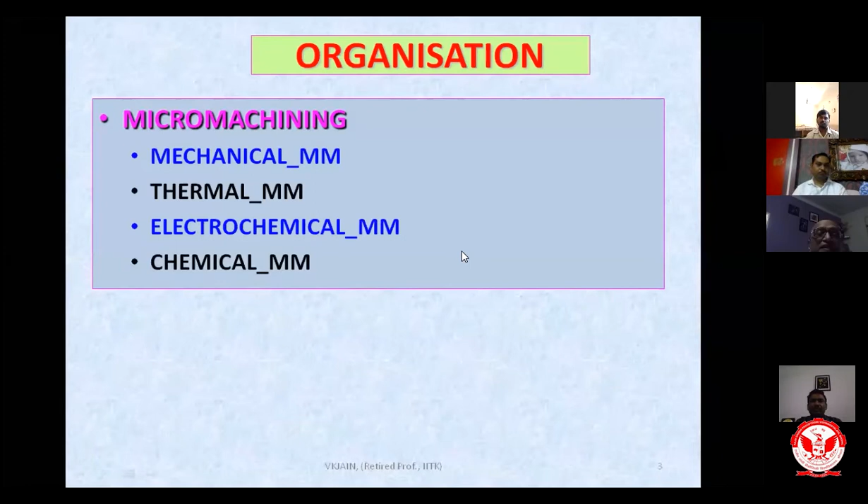Now, organization of the talk is as follows: micromachining, mechanical type of micromachining, thermal type of micromachining, electrochemical type of micromachining, and chemical type of micromachining. Since the time is limited, I will try to cover most of it. If something is left, then you can see in the books available on this particular subject.

Now first let me start with what is micro manufacturing. A set of processes used to fabricate features, components, or systems with dimensions most conveniently described in micrometers. When we talk of micro manufacturing or micromachining, the dimensions which we are making or fabricating should be less than 1 millimeter and definitely greater than or equal to 1 micrometer.

Now the question arises, what are the various methods of micro manufacturing? So there are these: material deposition can be used for micro manufacturing, material removal can be used, forming and shaping processes can be used for this purpose, joining can be used, and then casting can be used.

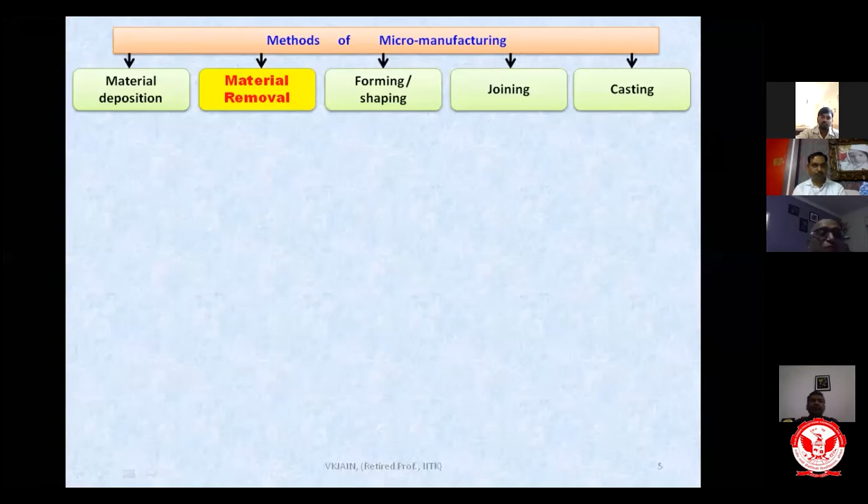You can see in material deposition, electrochemical spark deposition - lot of work has gone in this direction at IIT Kanpur. Electro discharge deposition, chemical vapor deposition also known as CVD, physical vapor deposition PVD, rapid prototyping, rapid tooling, additive manufacturing, or layer manufacturing - there are various names for this particular technique.

And then finally, LIGA. Then there are material removal or attritious processes, they are basically of two types: traditional material removal processes and advanced material removal processes. This talk will be concentrated on advanced material removal processes. Then you have forming or shaping, like rolling, forging, extrusion and drawing sheet metal. Then you have the joining processes like welding, brazing, soldering, and then you have the casting process.

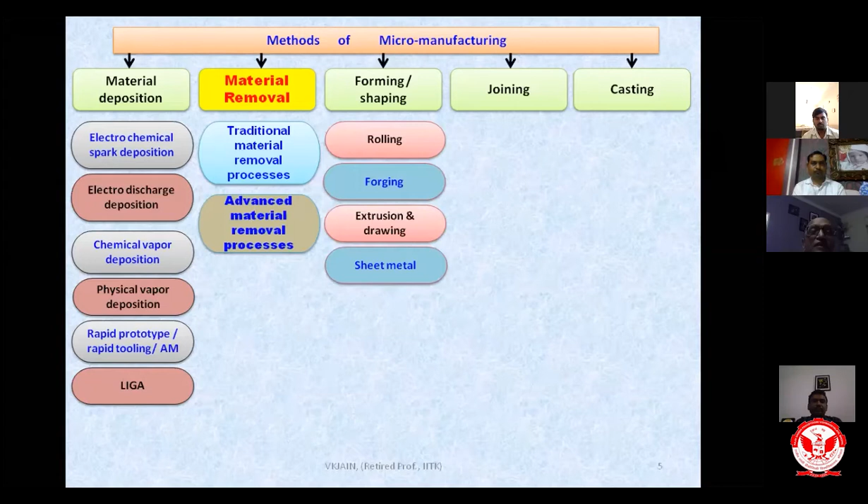Now, microfabrication has witnessed an excellence in R&D at a remarkable rate. If you see the last 3 decades or so, a lot of work has gone into micro manufacturing and microfabrication.

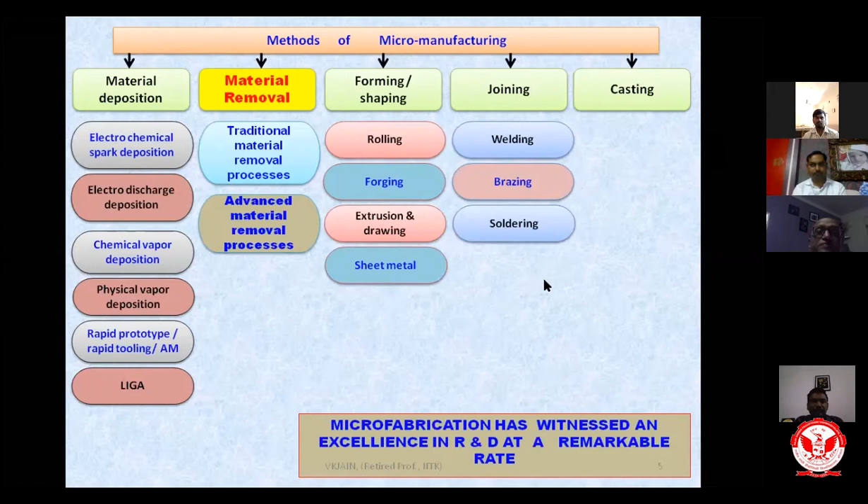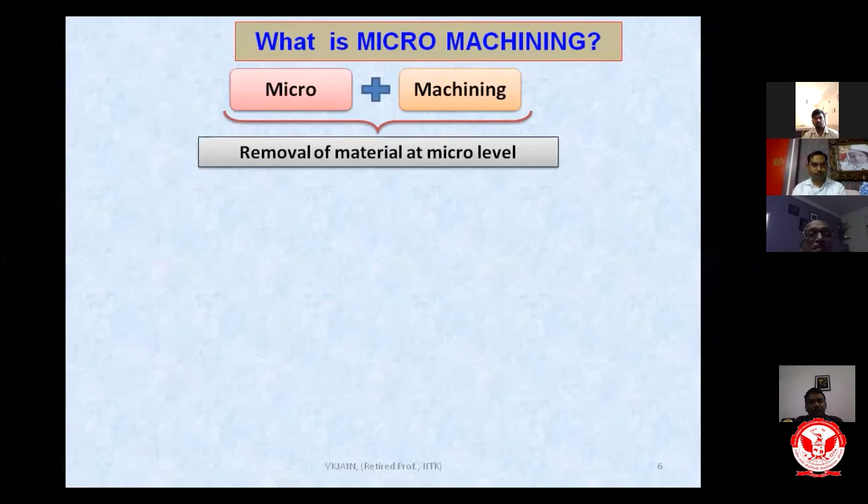What is micromachining? This is very important. So it is made up of 2 words: micro plus machining, that's the removal of material at micro level. Now the important thing is: macro components, but material removal is at micro nano level - then also you call it micromachining. Micro nano components and material removal is at micro nano level.

Examples: MEMS and NEMS. Now you can see here a picture - its size is 2 millimeter by 2 millimeter, and this is the leg of the house fly. You can see in this 2 millimeter by 2 millimeter sheet or screen, how many components are there. So each component is having the size smaller than 1 millimeter or so, and all features of that component are there.

Unfortunately, the present day notion related to micro manufacturing is that it means machining of highly miniature components with miniature features. Literally, it should not be so. It is not correct, because micro machining is made up of two words: micro plus machining.

That simply means machining at micro scale or micro level. So the correct definition is material removal at micro nano level, with no constraint on the size of the component. This is very important, you cannot put a constraint on the size of the component. The size of the component may be macro or meso, but still machining is at micro or nano level, so you call it micro machining or nano machining.

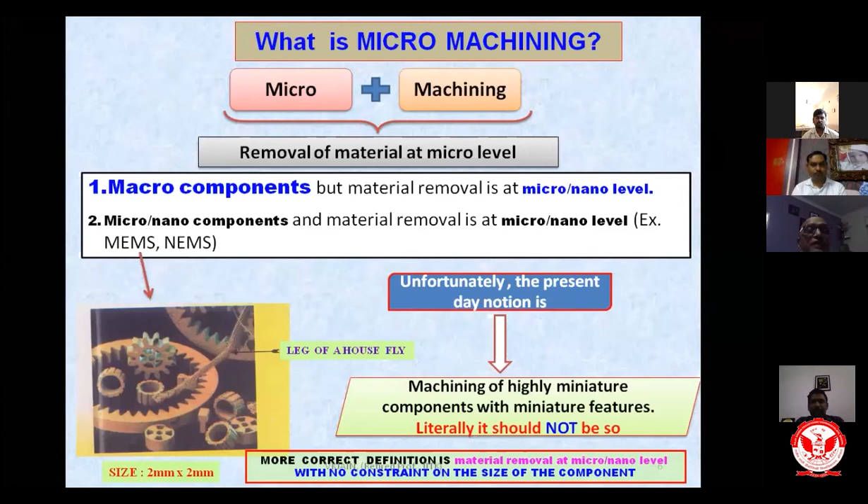Now, material removal processes can be classified into micro nano machining and micro nano finishing. In micro nano finishing, you are removing material at the micro or nano level, but the difference is that in micro machining you are creating a feature, while in micro nano finishing you are changing the characteristics of the surface produced by other methods, improving or deteriorating the surface finish according to the requirement. In certain cases, you may need a higher surface roughness value, and in some cases a lower one.

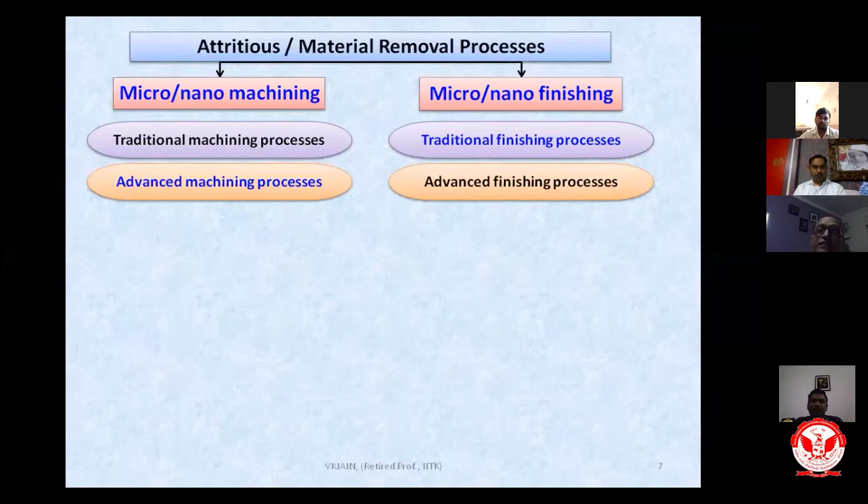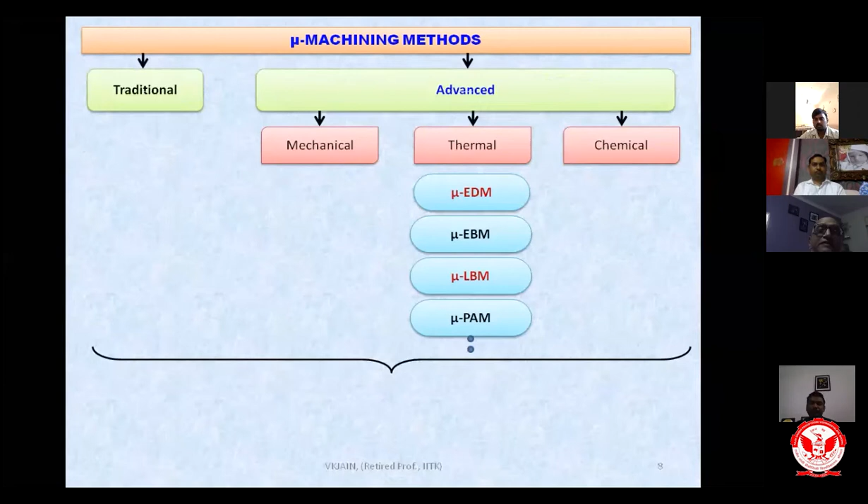Let us see what are the various micro machining methods. We have two types of micro machining methods. One is the traditional micro machining method, and you are familiar with these, like micro turning, micro milling, micro drilling, micro grinding, etc. Although grinding is a finishing process, it's still considered a machining process.

Then you have advanced micro machining methods. They can be classified into three categories: mechanical, thermal, and chemical and electrochemical. In case of mechanical, you have micro AJM abrasive jet machining, ultrasonic micro machining, and abrasive water jet micro machining.

In the mechanical type, you also have finishing processes like abrasive flow machining, magnetic abrasive finishing, magneto-rheological abrasive flow finishing, and magnetic float polishing. A lot of work has gone into these finishing processes at IIT Kanpur, but in this talk I am not going to talk about nano finishing processes. It is concentrated mainly on the micro nano machining processes.

Then you have the thermal processes: electric discharge micro machining, electron beam micro machining, laser beam micro machining, plasma arc micro machining, and so on. Then you have chemical or electrochemical type: electrochemical micro machining, photochemical micro machining, and so on. I have not listed another category, biological machining, where enzymes are used for machining or removing material.

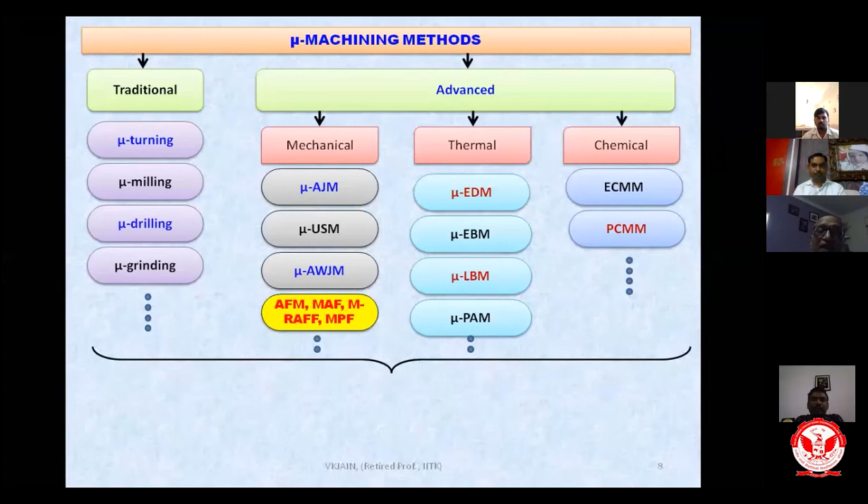Then you have these individual processes, and all of them have certain weaknesses and certain strengths. If one particular process cannot perform your work, what will you do? You can combine two or more processes to achieve your goal, and when you combine two or more processes, you call it a hybrid process.

Now, the beauty of the electrochemical spark micro machining process is this: ECM, electrochemical machining, is used for electrically conducting material, and EDM, electric discharge machining, is also used for electrically conducting material. But what about electrically non-conducting material? So researchers combined EDM plus ECM and developed a process called electrochemical spark machining. This process is based on both ECM and EDM, but it can be used for both electrically conducting and electrically non-conducting material.

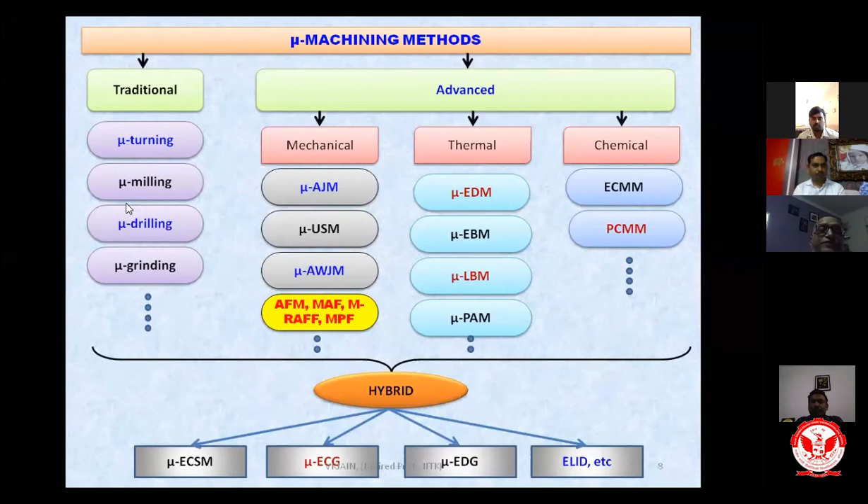Now I will quickly, in brief, tell you about the working principle of the mechanical type of micro machining process. It includes abrasive water jet machining, abrasive jet machining, and ultrasonic machining. Here you can see the inlet of water, the inlet of abrasive particles, here is a nozzle, and here is the guard, etc. And this is the mixing tube, where you have both water and abrasive particles.

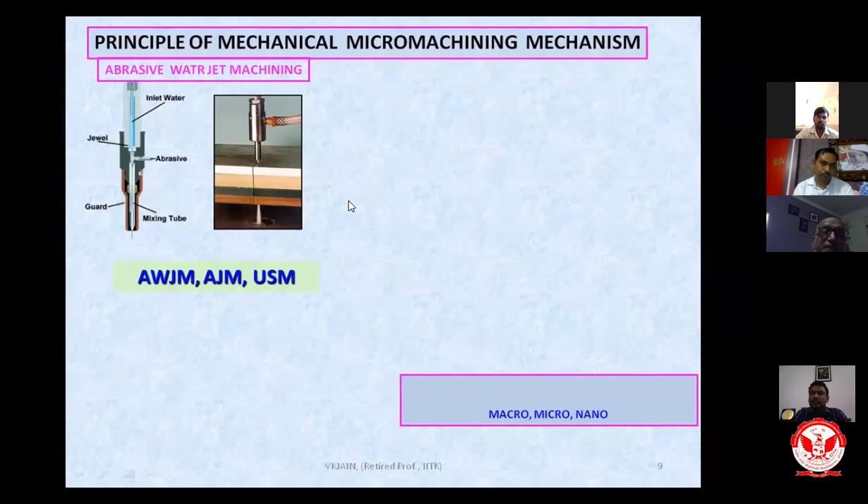When this abrasive water jet is coming, as you can see here, it is able to cut very thick metal and non-metal or composite material sheets. This is the abrasive water jet, this is the head, and this is the workpiece being machined. This process is very common for cutting and even dismantling nuclear power plants. There you don't want to send a human being, rather you send a robot to dismantle the nuclear power plant. Then you have the ultrasonic machining process.

One thing I would like to mention here: in case of abrasive water jet machining, the velocity with which this jet is moving is very, very high. It can be as high as 900 meters per second. So you can calculate the kinetic energy of the abrasive particle with which it is hitting the workpiece surface, and that kinetic energy is responsible for removing the material in this particular case.

Same way, here is the ultrasonic machining or micromachining process principle. This is the tool, and this is the workpiece being machined, and you have the slurry. This slurry consists of liquid and abrasive particles mixed with some additives. When you are vibrating this tool, it vibrates at ultrasonic frequency, which simply means around 20,000 hertz, 20,000 times per second. There are hundreds of abrasive particles hitting the workpiece surface, and this is quite heavy.

So with high kinetic energy, when these abrasive particles are hitting the workpiece surface, the workpiece material is removed either by fracturing or by deformation, depending upon the type of workpiece material. And you are able to create a feature which is close to the replica, the inverse replica of the tool.

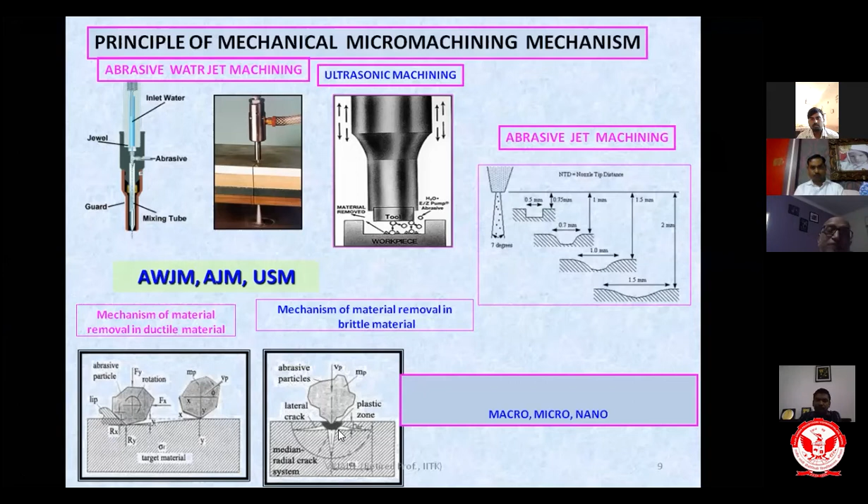Once it becomes a brittle material, the mechanism of material removal is the same as I showed earlier. Here you can see forces acting: one is the normal force, and this is the cutting force. This is removing the material in the form of microchips, or here are the brittle fractures.

Abrasive jet micromachining, or abrasive jet machining. I am not going to discuss all these details, but various types of abrasives are used. The gases, other than air, you can use carbon dioxide gas, nitrogen, or air as the gas. The nozzle is made up of tungsten carbide or sapphire.

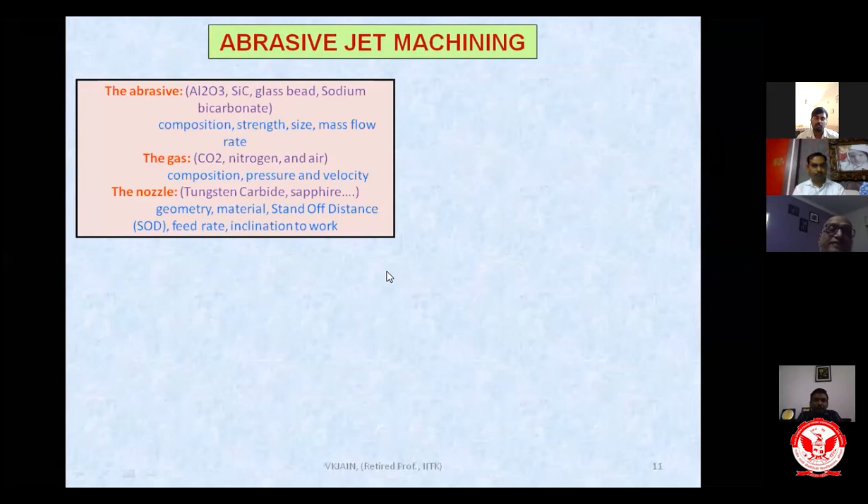It is quite commonly used for cleaning purposes also, and finishing purposes also. You can see the hood is here, so that whatever abrasive particles are spreading in the atmosphere, they don't go out and hurt or harm the operator. Rather, it is taken out from the hood.

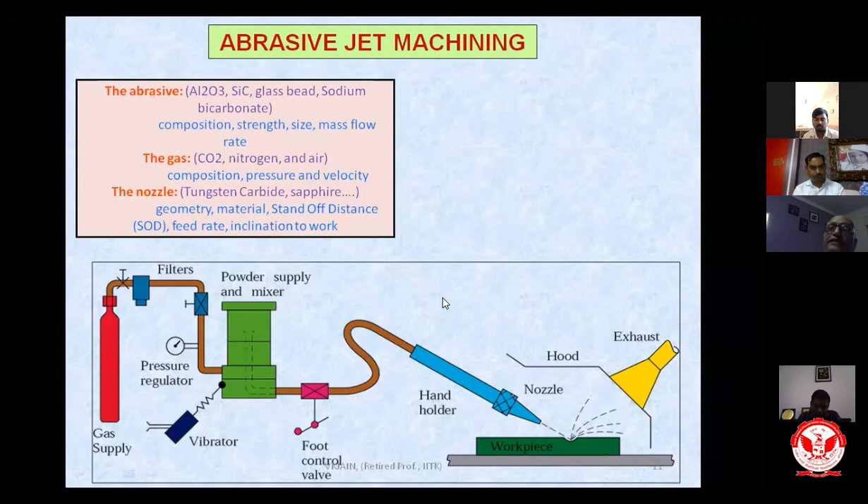You can see here some of the applications of this abrasive particle jet cutting. This cavity has been formed, and they are going to cut it. This cavity has been formed, and these cavities can be of more than 1 millimeter, or they can be of less than 1 millimeter, depending upon the size of the nozzle and the machining parameters that you are using.

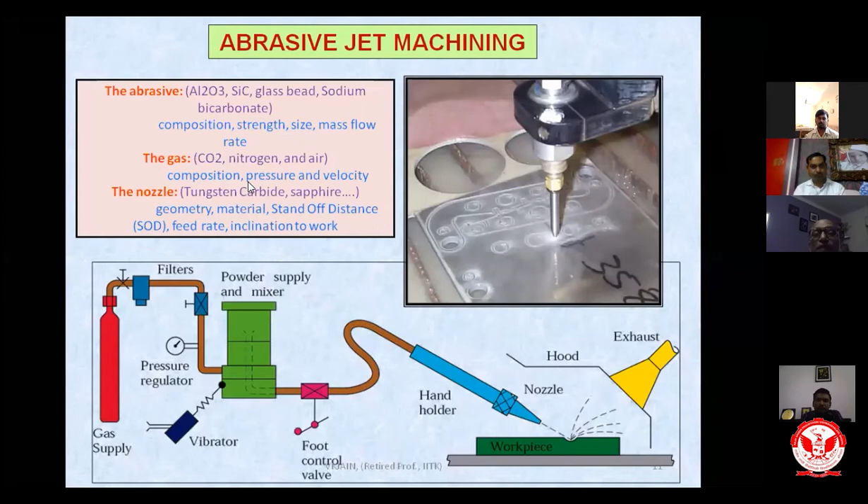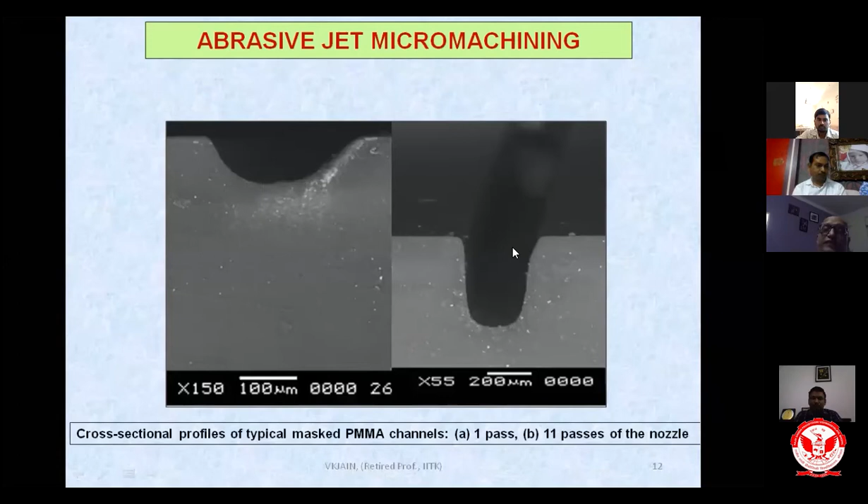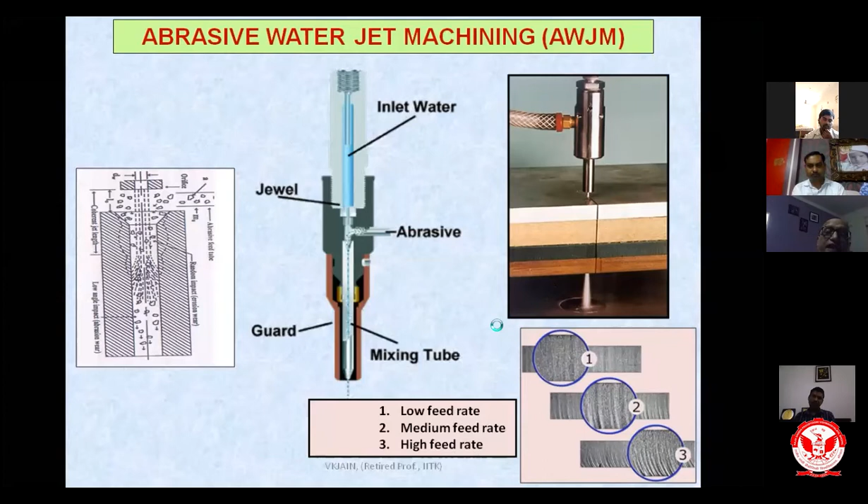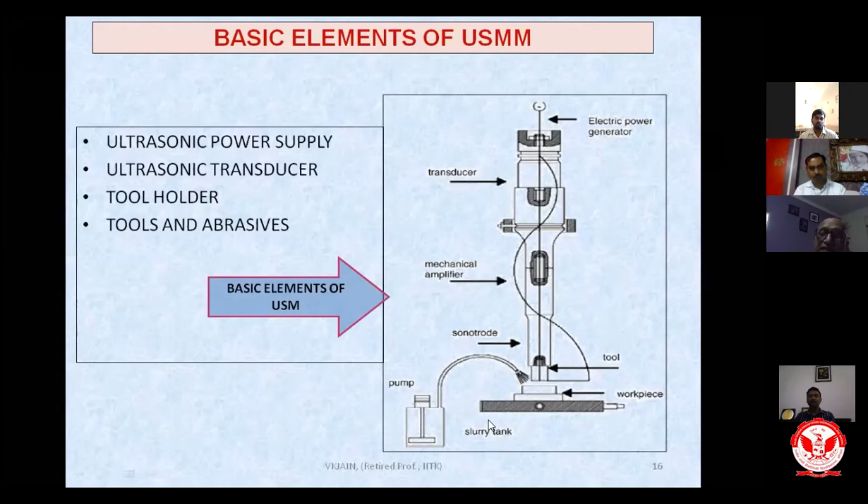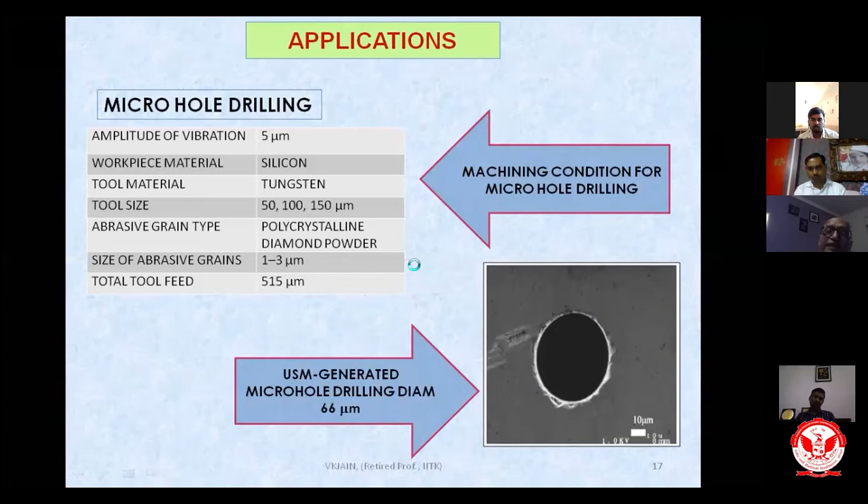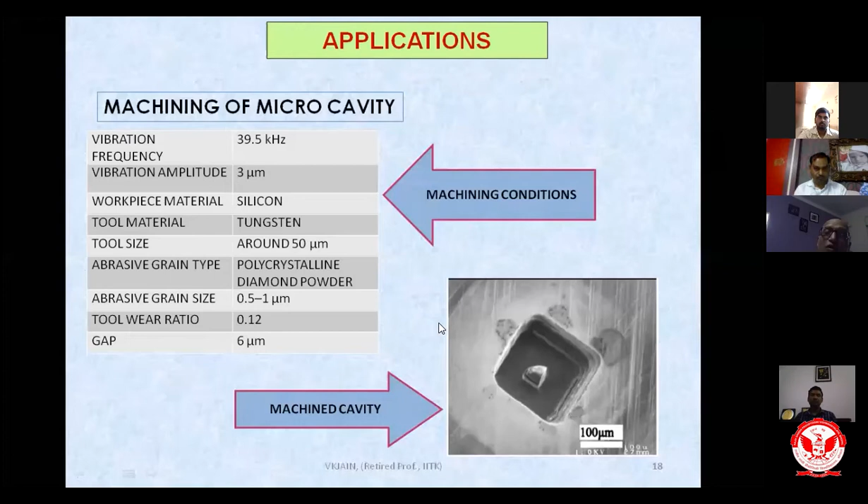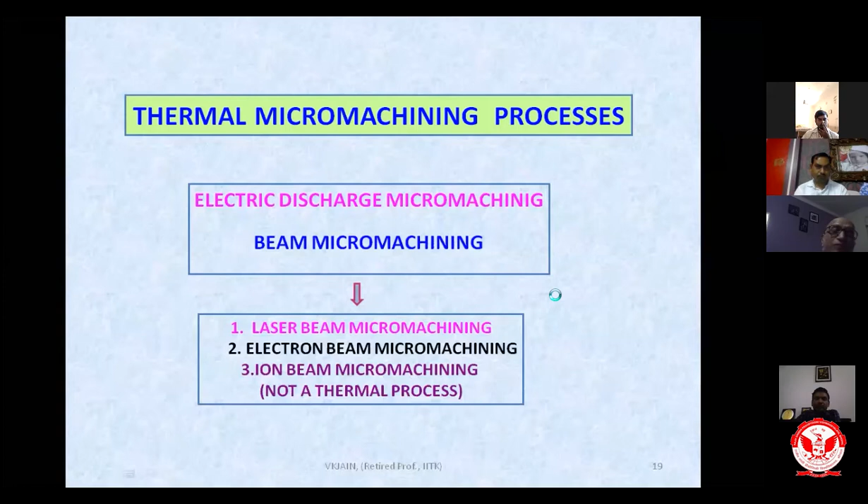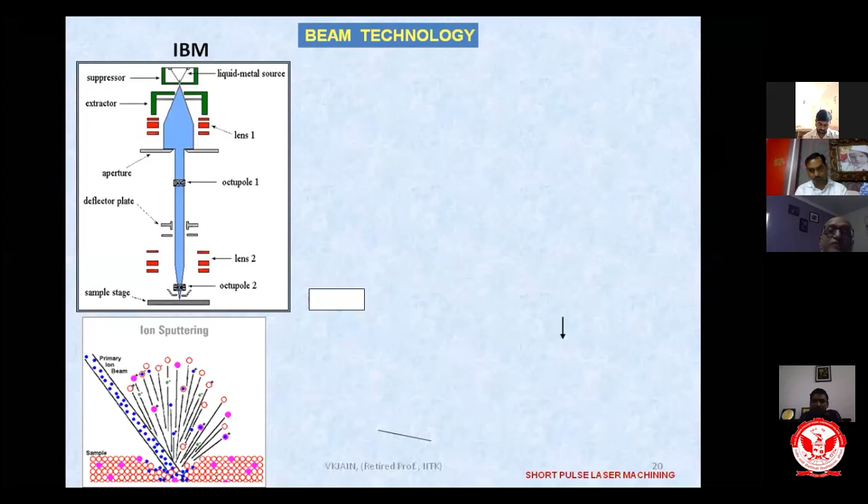But really, the energy of the ion is much more than the bonding energy of the atoms. So what happens is that one particular ion removes more than one atom - a cascading effect, as it is known. And once it removes more than one atom, if it still has larger energy, it will go and get implanted at the bottom, as you can see over here. Really, we don't want implantation of the ions at the bottom, because that is known as a defect. So this is how it works.

Now let us see the electron beam machine. Here we are using electrons instead of ions. You know, you can have electrons and ions in any atom. These electrons are considered to be massless, meaning they hardly have any mass compared to ions or atoms, but we are able to utilize the electrons for removal of material.

How? The electrons are extracted from the cathode and move from there towards the anode. Here is the anode, and these are the focusing coil and deflecting coil. With the help of the focusing coil, you can focus this beam at a particular point on the workpiece surface, and you can move this beam in this direction or that direction with the help of the deflection coil.

Now, atoms or electrons are considered to be massless, but we know the kinetic energy of a particle is half mv squared, where v is the velocity and m is the mass of the particle, here the electron. The mass is negligible, but the velocity with which these electrons move from cathode towards the anode, or towards the workpiece, is very close to the velocity of light. And the kinetic energy becomes half mv squared. So if you calculate, you will find it has enough energy, and when it hits the workpiece surface, it is able to raise the temperature of the surface enough to melt and vaporize it.

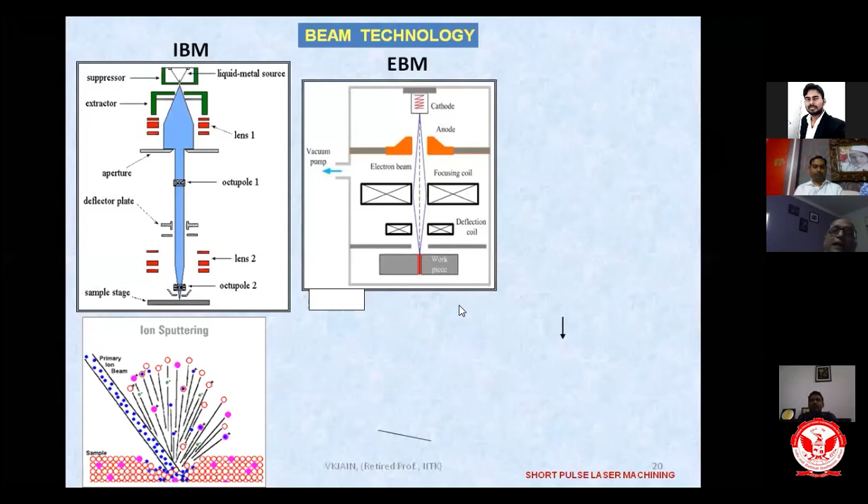Any material, including diamond, you can melt or vaporize, or melt and vaporize the workpiece material, depending upon the workpiece material type. And if you have relative motion between the beam and the workpiece, you can create different kinds of features on the workpiece surface. This is how ion beam machining and electron beam machining work very efficiently.

One thing I'd like to mention: ion beam machining is not used even for micromachining, it is used for nano machining. Micromachining by ion beam machining takes a lot of time, so normally it is used for nano machining. But electron beam micromachining is used for micromachining, and laser beam machining is also used for micromachining.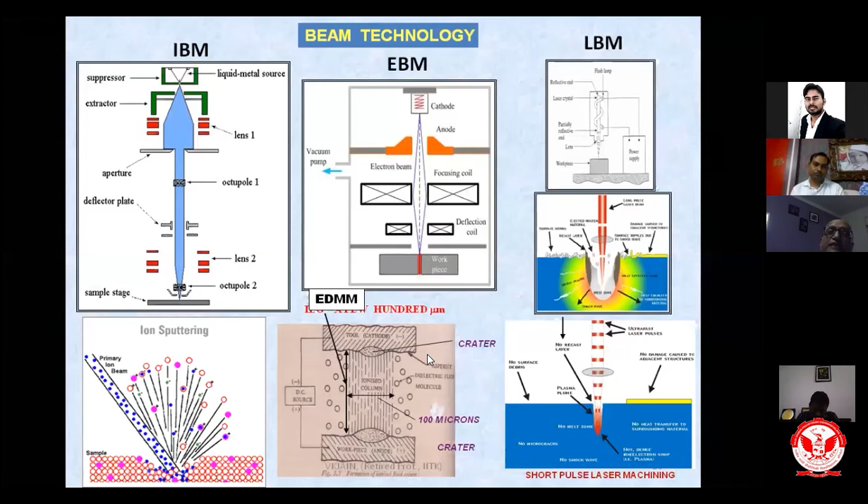Now, some features of electric discharge micromachining: ability to machine any electrically conducting material irrespective of its hardness. If you recollect, traditional micromachining processes like micro turning, micro milling, micro drilling, etc., require the tool to be much harder than the workpiece material, so there are a lot of constraints in micromachining. In electric discharge micromachining, there is no constraint of hardness of the workpiece material, and machining can be done without applying pressure.

Also, in case of EDMM and EDM, you are not applying any mechanical force. You can easily machine curved surfaces, inclined surfaces, and very thin sheets. Micro features can be created, including high aspect ratio features, with the help of electric discharge micromachining. High aspect ratio means depth divided by the diameter of the feature being created, right? That is known as aspect ratio.

Now, examples of the EDMM process. You can clearly see here these are the micro holes that have been drilled: 12.5 micrometer, 10.5 micrometer, 8.5 micrometer, 6.5 micrometer. These are the kind of holes which have been drilled using the electric discharge micromachining process.

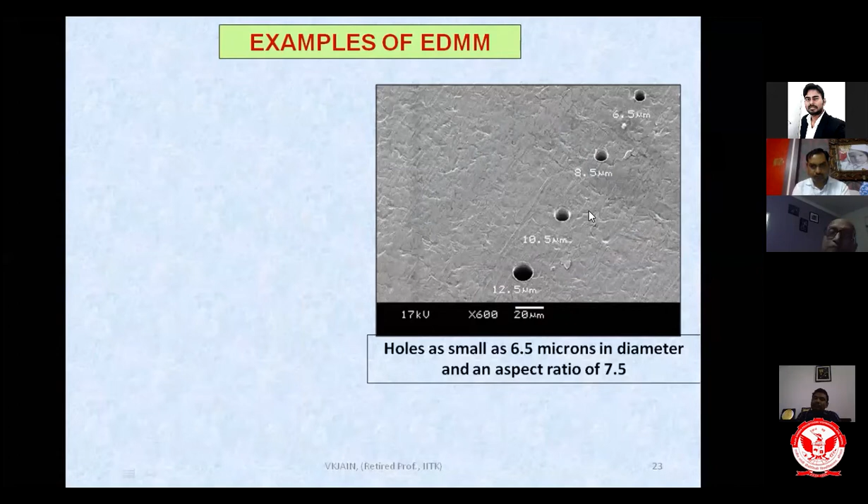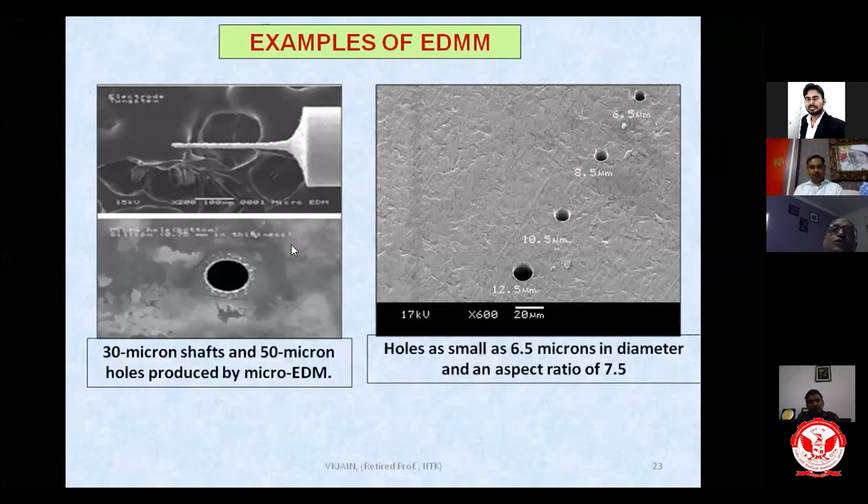Now you can see this is the rod or small pillar, or the tool, that has been created with the help of electric discharge micromachining. And the same tool has been used for drilling a hole. That's known as in-situ utilization of the tool. This is very important because if you shift this tool to some other machine, there will be an axis difference and you will not get the accurate size of the hole. So it is always desirable that wherever you create the tool for micromachining, especially electric discharge micromachining and electrochemical micromachining, you should perform the micromachining operation on that same machine.

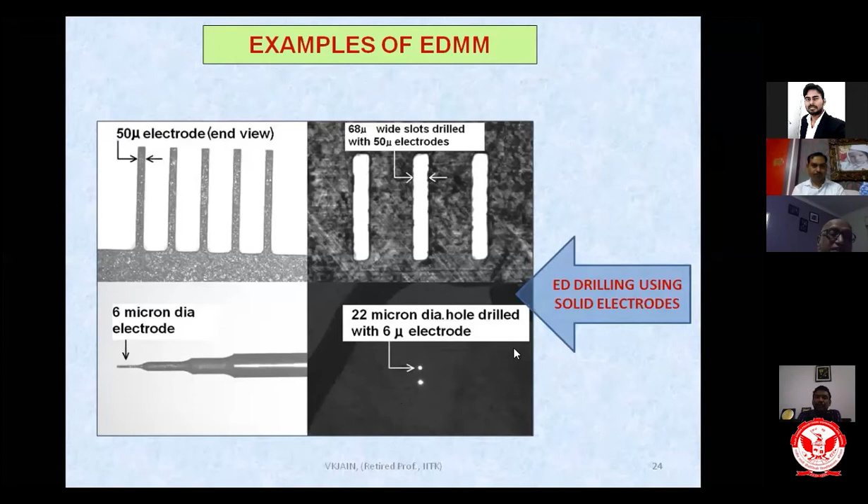So you can appreciate from these examples the kind of different components created. Now please note carefully, I am calling all of them micromachining, but the size of the component is in macro or meso size, meaning much larger than 1 millimeter.

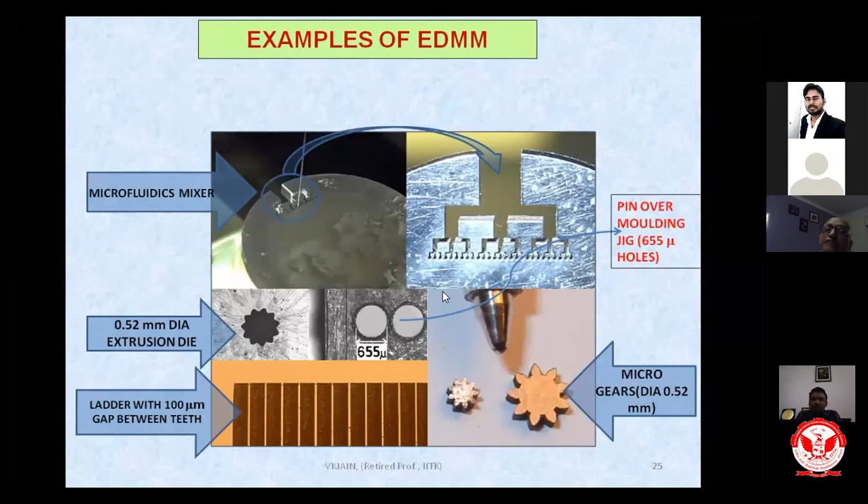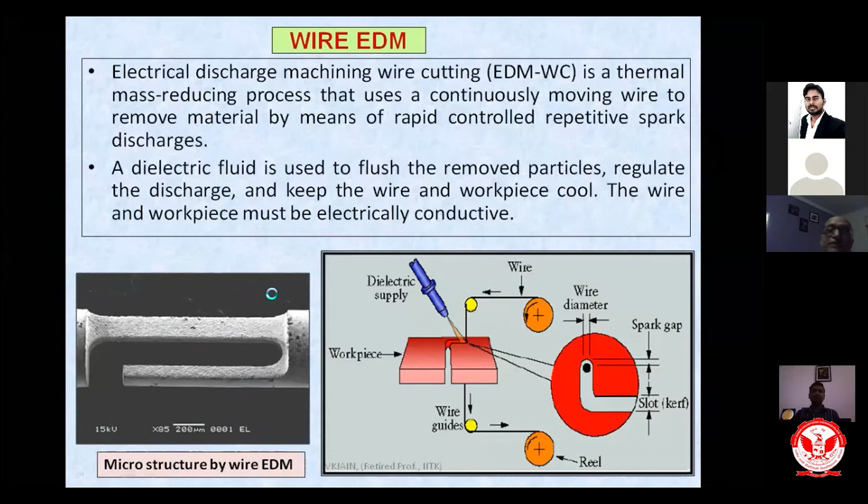Then a very famous, very useful process is known as laser beam micromachining. I think all of you may recollect your childhood days, where you might have taken a lens and concentrated the sun rays, burning a piece of paper and telling your friend, see, here is the magic, I am able to burn a piece of paper with the help of this device, that is the lens. What you are really doing is concentrating the sun rays, and the temperature or energy becomes so high that the paper burns.

A similar kind of concept has been used in developing the laser beam machining and laser beam micromachining process. Here you have the laser gun. The laser beam is created with the help of a lens, it is concentrated, and at a particular point it is focused. The temperature is so high in this process that any material known to us can be melted or evaporated at that particular point.

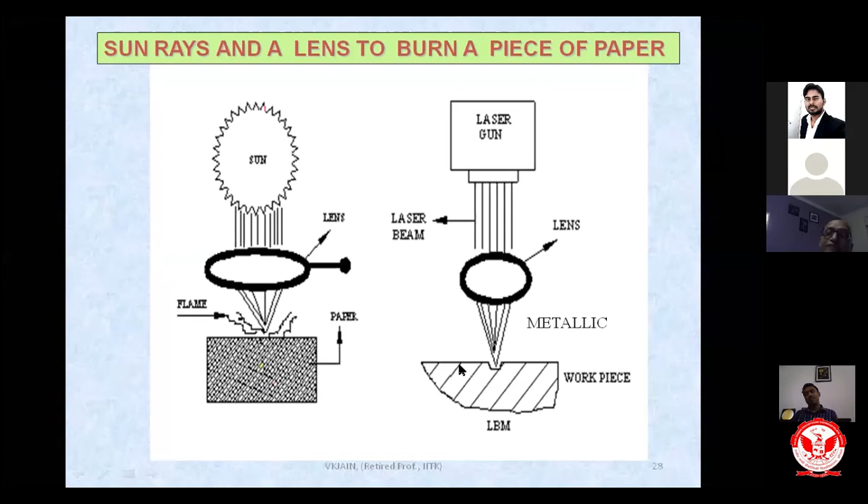Now, if you have relative motion between the workpiece and the laser beam, you can create different kinds of features. The workpiece material can be metal, non-metal, or a composite material. It need not be electrically conducting or non-conductive, but two constraints are there: the material should not have very high thermal conductivity and should not be highly reflective. Otherwise, you cannot machine it efficiently. That is the main constraint with this process.

Now, there are basically two types of laser: gas laser and solid state laser. Here the lasing medium is say CO2 or Nd:YAG laser, and you can see the wavelengths. Excimer laser is 193 to 351 nanometer. In case of CO2, it is 10 micron, and in case of Nd:YAG laser, 1.064 micron. These are the wavelengths.

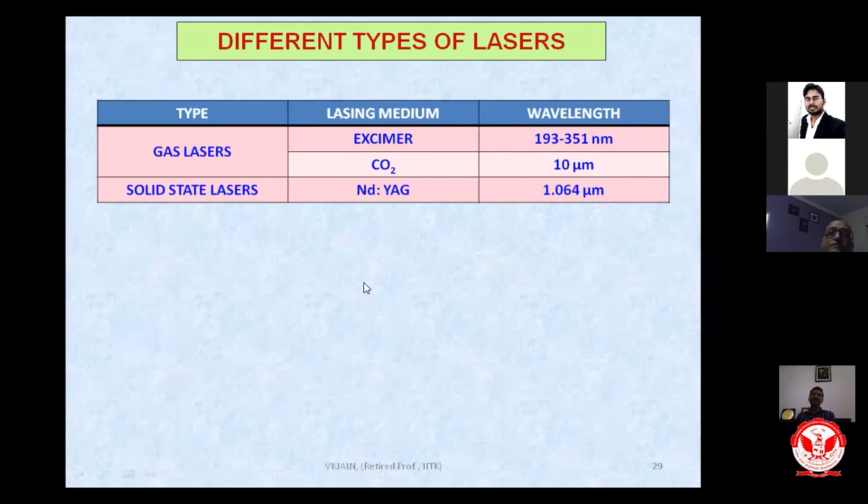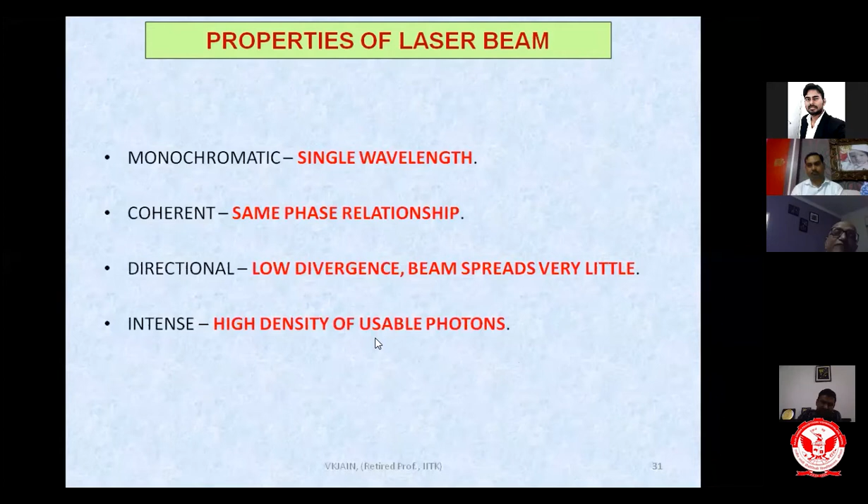Now, there are certain properties why laser is so commonly used in industry and day-to-day life. It is monochromatic, single wavelength; coherent, same phase relationship; and directional with low divergence. This is very important, it has very low divergence and the beam spreads very little. Finally, you have very high intensity of usable photons. That's why any material known to us can be melted, vaporized, or burned with this process.

Now you can see here, this is an enlarged view of the same picture I explained earlier. You can see the defects clearly: surface debris are there, this is damage caused to the adjacent structure, and this is the cavity being created. This is the melt zone, shock wave is moving over there, these are micro nano cracks being formed, this is the recast layer, and this is the ejected molten material going out, which may get deposited here or elsewhere.

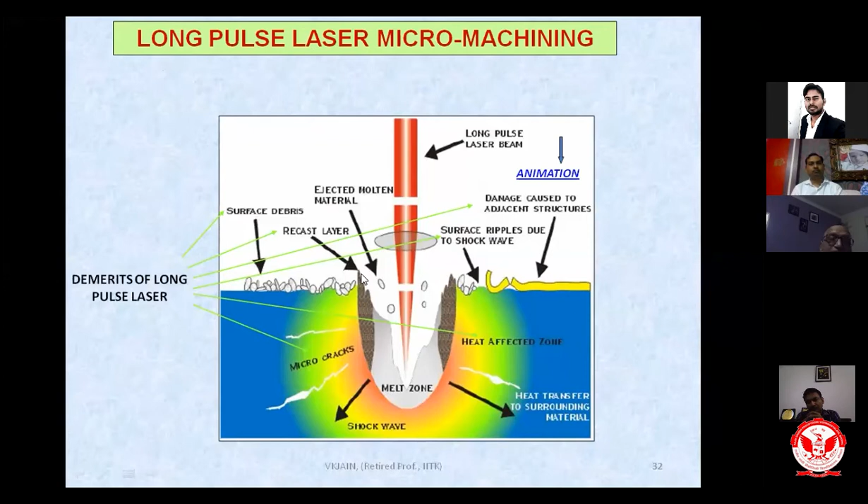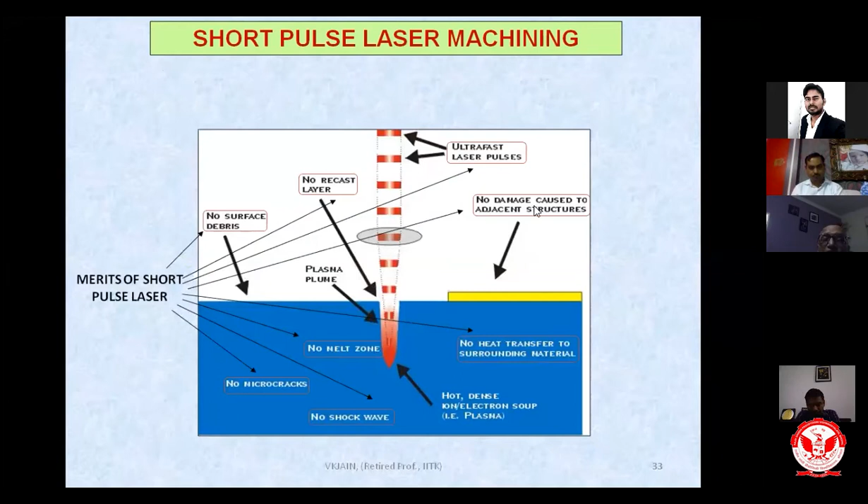So you can see clearly, when using the long pulse laser for micromachining, you get so many defects. Hence, it is recommended not to use the long pulse laser, rather use the short pulse laser. Now you can see here, there is hardly any surface damage, no damage caused to the adjacent structure, no recast layer, and so many other defects are not there.

Now another thing is it can be used for all materials. As I told you, there is very high power consumption, and it cannot cut material with high heat conductivity and high reflectivity. These are the two constraints with this particular process. Otherwise, it is very useful.

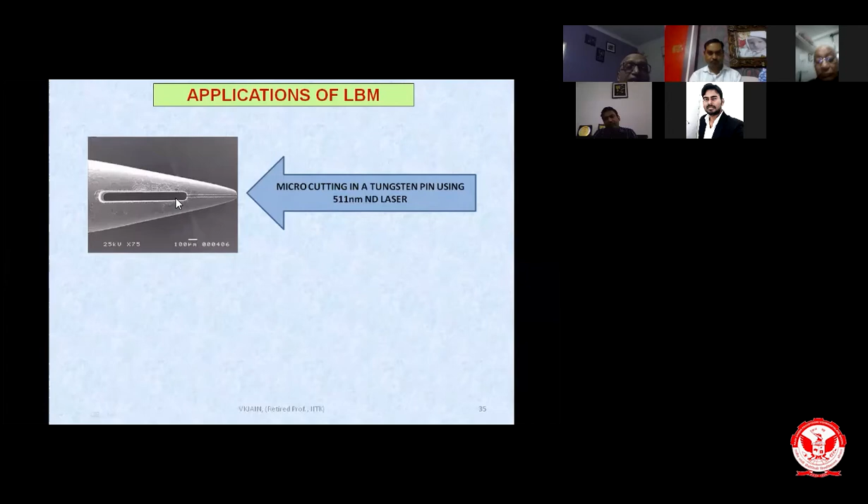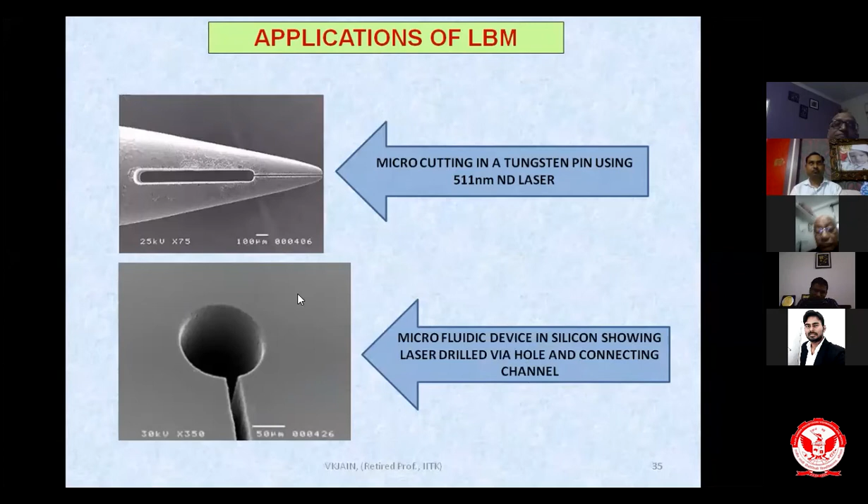Now this is very interesting. I don't know whether you can see me or not, but I don't have hair. But most of you may be having hair. Now if I ask you to write your own name on the hair, I don't think you can write your own name on the hair. But it has been done.

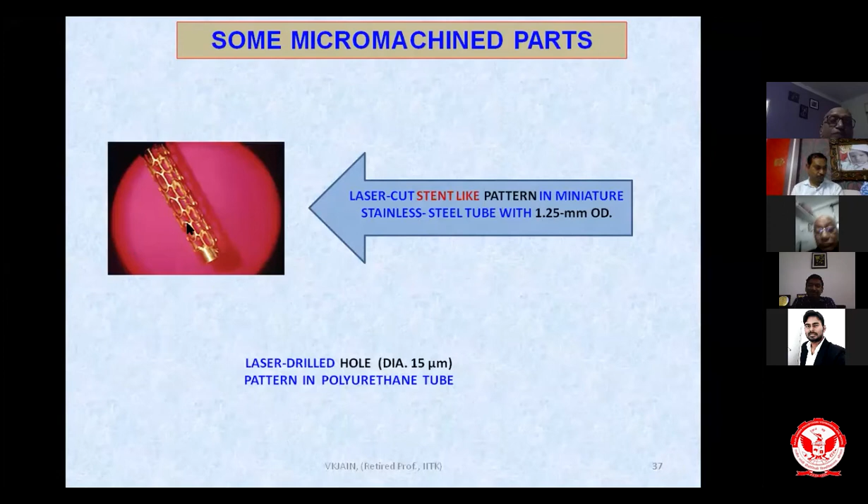Now you can see here a laser cut stent-like pattern on a stainless steel tube. The outer diameter of this tube is 1.25 millimeter, and you can see you are able to create micro features on this particular tube. This is a stent-like pattern over there.

And then there is another one. You can see the hole of 15 micrometer. Circular hole and square hole have been drilled on this particular tube with the help of laser beam micromachining, and such kind of features you can create easily with the help of laser beam micromachining.

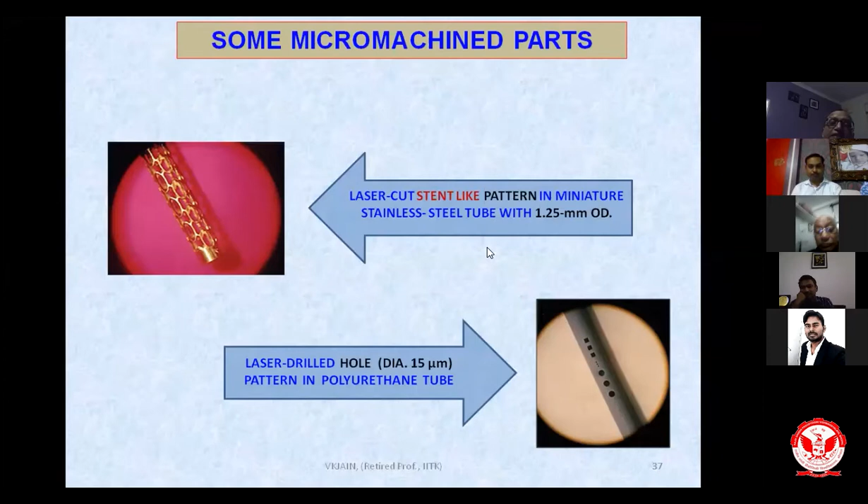Now the question here is whether in this particular chamber you should have air atmosphere or vacuum. Now let us see why vacuum is required. Now this is the electron beam which is coming over here and hitting the workpiece surface, and there is a vacuum, so there is no interaction between the air molecules and the electron beam.

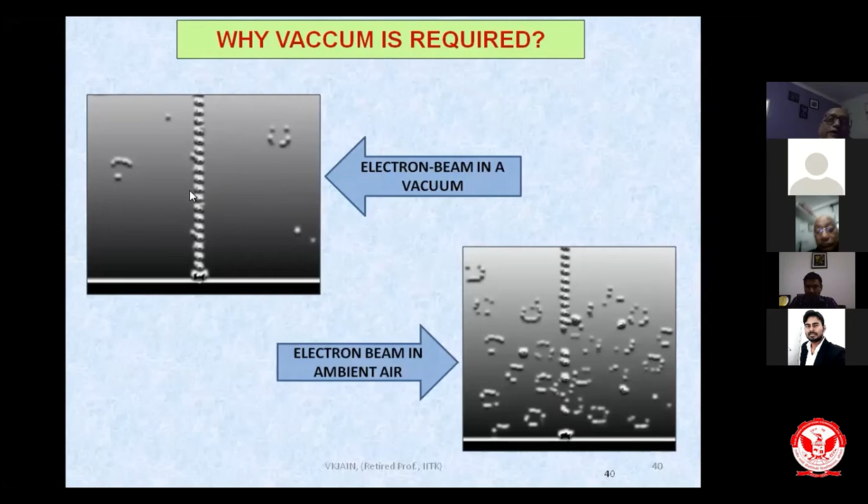But if you see this one, here air is present inside. We have not created the vacuum in the machining chamber, and you can see these electron beams are hitting, colliding with the air molecules, and they are dispersing, going away from their path. Whatever energy they have, the molecules are also quite strong, and you are not able to get a good cut over here. You need very high kinetic energy for getting a reasonably good cut over here. So it's always desirable to have vacuum in the machining chamber in case of electron beam micromachining.

Now, with the help of electron beam micromachining, industry people created 90 micrometer holes with a density of 4,000 holes per square centimeter on stainless steel, with a sheet thickness of 0.2 millimeter, and the time taken is just 10 microseconds per hole.

But industry people, especially textile and fruit juice industries, were not happy. They said it is too big, we don't want that. So they created holes of 6 micrometers, 0.006 millimeter. Hole density is 200,000 holes per centimeter square, thickness is 0.12 millimeter, and the time taken is just 2 microseconds per hole, compared to 10 microseconds earlier. So you can see the capabilities of electron beam micromachining, and you can make many required components with this process.

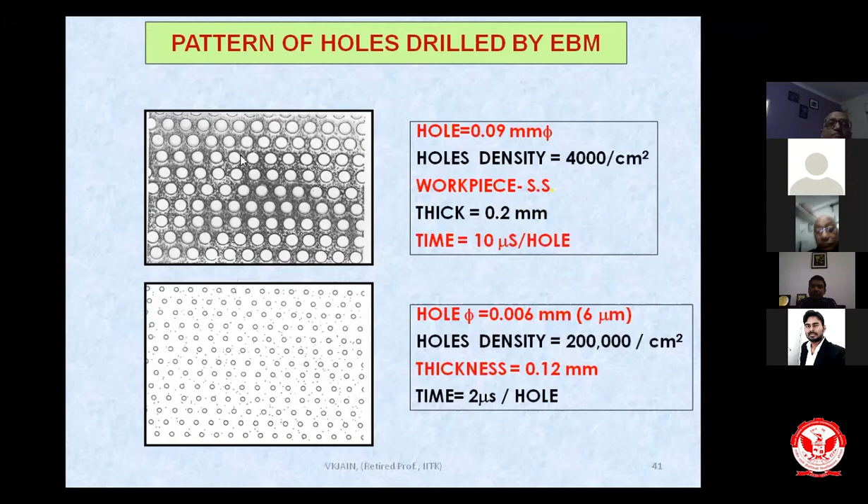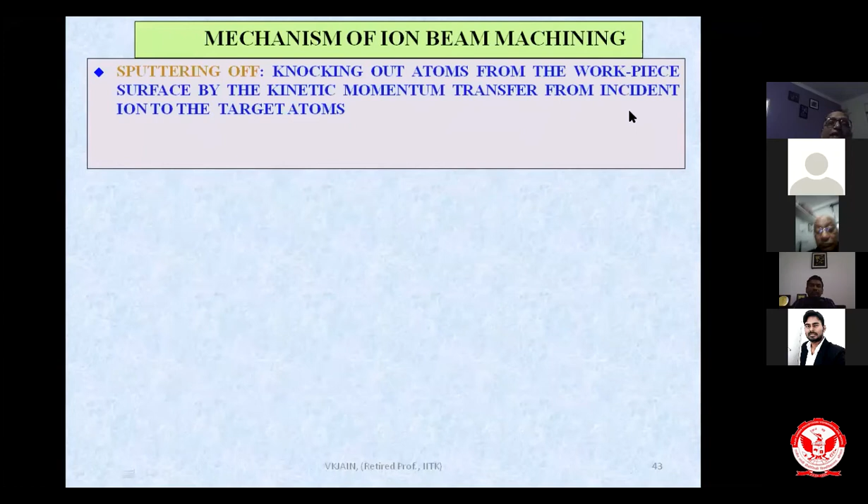Ion beam micromachining - I have explained the mechanism to you. It is known as sputtering, that is, knocking out atoms from the workpiece surface by kinetic momentum transfer from the incident ion to the target atoms. Removal of atoms occurs when the energy transfer exceeds the binding energy of the atoms.

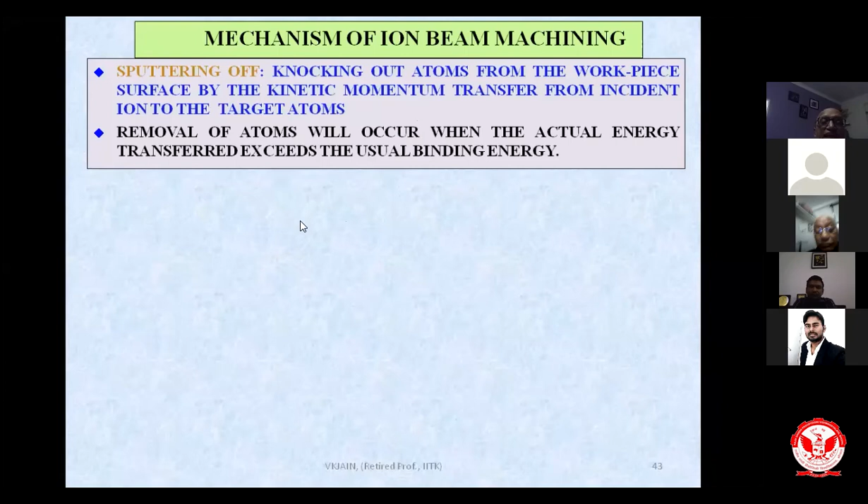So what it means is, at sufficiently high energy, a cascading event takes place. Ions penetrate more deeply into the solid, several atoms or molecules are ejected out, and the bombarding ion becomes implanted deep within the material. That is what I showed you - implantation by one ion, where more than one atom is displaced or removed.

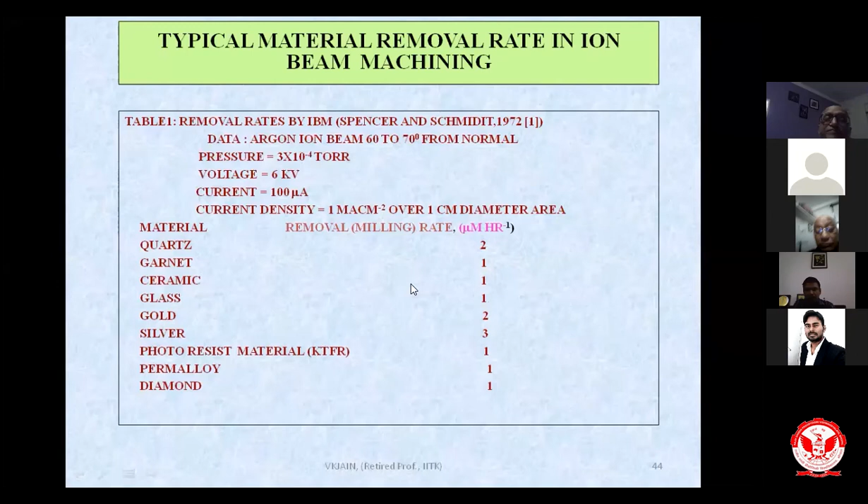As a result of electrolysis, the workpiece material is dissolved, and ferrous hydroxide or ferric hydroxide is formed if it's iron. This electrolyte moves out of the inter-electrode gap at a reasonably good velocity, 20 to 30 meters per second. So you are able to create an approximate inverse replica of the tool on the workpiece surface. This is the principle used for electrochemical micromachining.

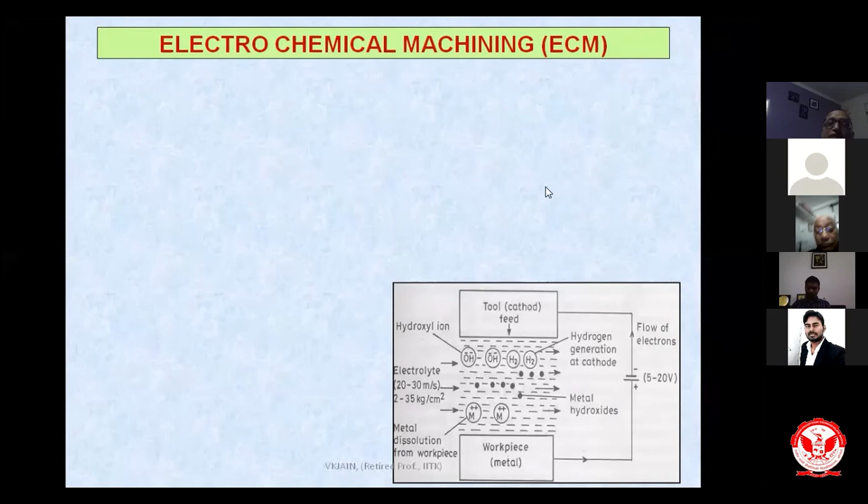These are various kinds of setups that have been developed. This setup was developed at Jadavpur University, and at IIT Kanpur many setups have been developed for electrochemical micromachining.

So the reactions, if it is iron, are: iron plus water gives ferrous hydroxide plus hydrogen gas. In some cases you get ferrous hydroxide, in some cases ferric hydroxide. So it is very important to know at what valency a particular workpiece material is dissolving, if you want to design the tool for electrochemical micromachining.

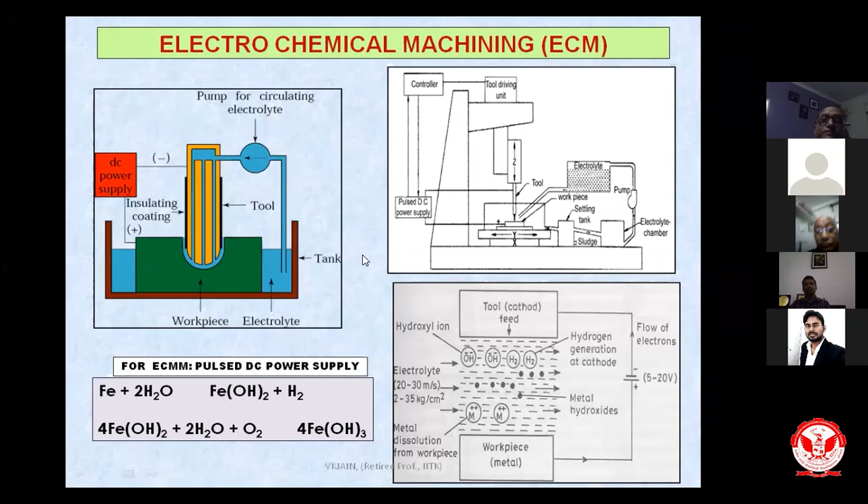Micropillars have nano hairs over them, and this surface becomes a hydrophobic surface. Now the question is how to create this hydrophobic surface artificially.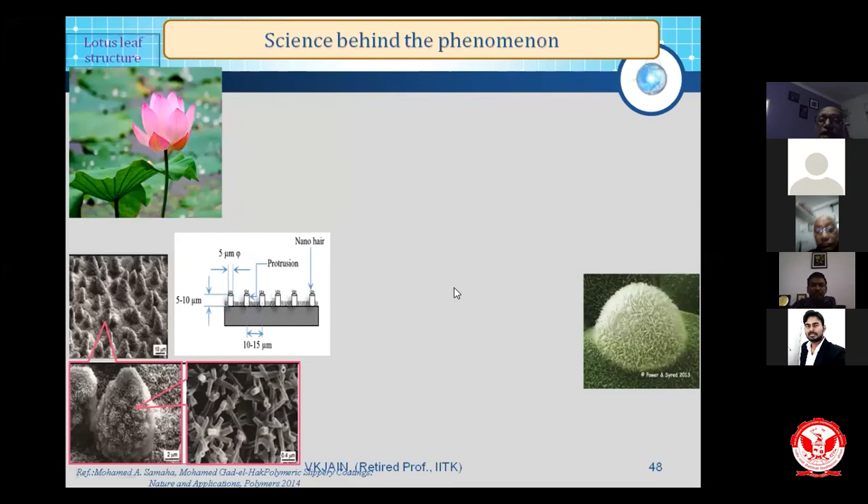And this is another example, esculenta. You can see here the micropillars and the nano hairs over here, and these are all hydrophobic surfaces. That means water does not stay there; the contact angle is more than a certain angle. Now you can see the hydrophobic surface shown here. This is the difference between this and this.

We wanted to create this kind of surface artificially on metals. Dr. Divyansh Patel did a lot of work in this particular area. You can see here this is the hydrophobic fabric. Nowadays people are making hydrophobic fabric.

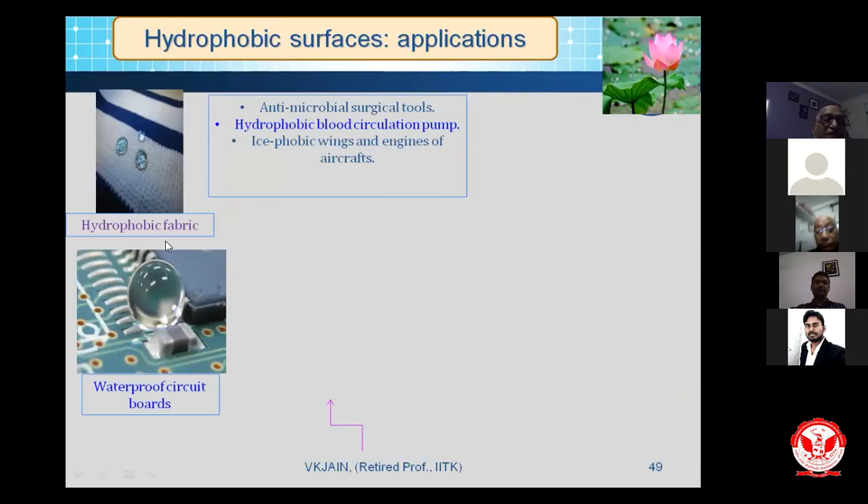So if you go during raining season, your clothes do not get wet. Or if you are going inside the sea or inside the river, your clothes will not get wet. So this kind of hydrophobic surfaces or hydrophobic fabrics are being produced.

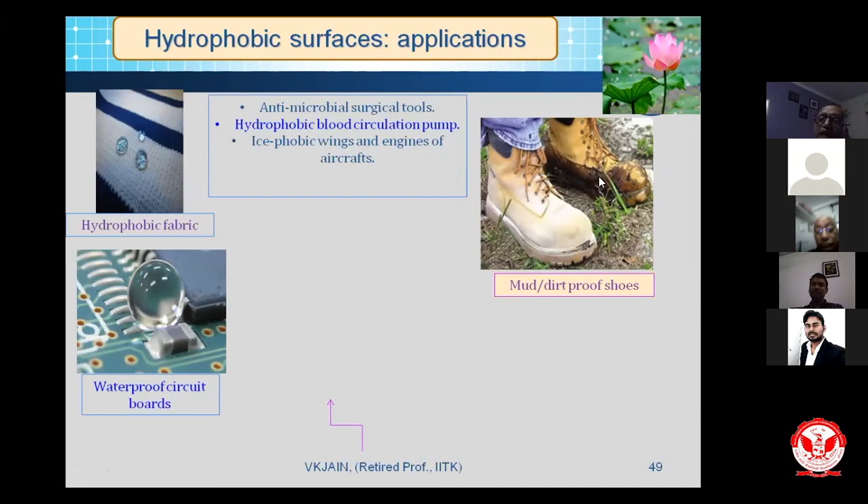Now see the shoes over here. This one is having the hydrophobic surface, this one is not. Then he went inside the mud. You can see the difference in the shoe. The one without the hydrophobic surface has a lot of mud on it. The one with hydrophobic surface has no mud remaining on it.

This is the sea, bottom of the ship. Now you can see here, this part is not having the hydrophobic surface, this part is having the hydrophobic surface. So bioorganisms are there on one, no bioorganisms on the other. It has a lot of applications, even in creating the wings of the aircraft so that no ice gets deposited or no water gets deposited there.

Now you can see a water/oil repelling application over here. It is just staying over there, not getting adhered to the surface.

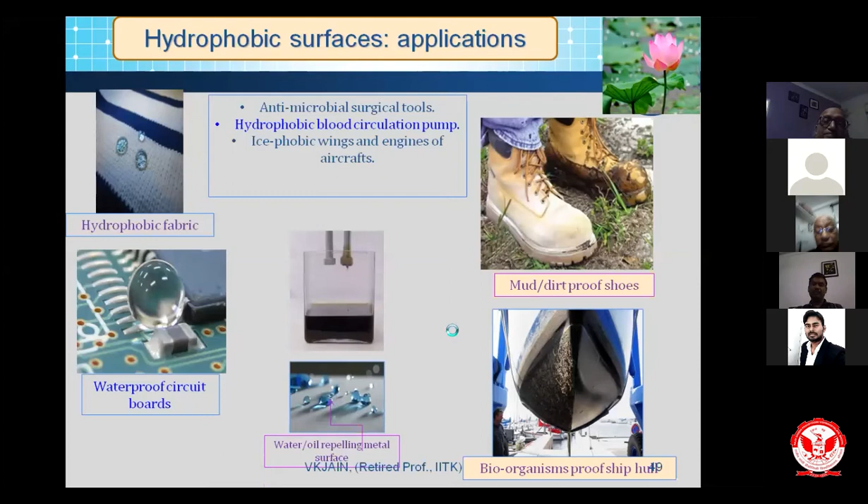This is the kind of feature that was created at IIT Kanpur using electrochemical surface texturing. Texturing was done, microchannels were created. Importantly, first they created the microchannel in this direction, then at 90 degrees they created the microchannel in the other direction. So they were able to create pillars of this kind.

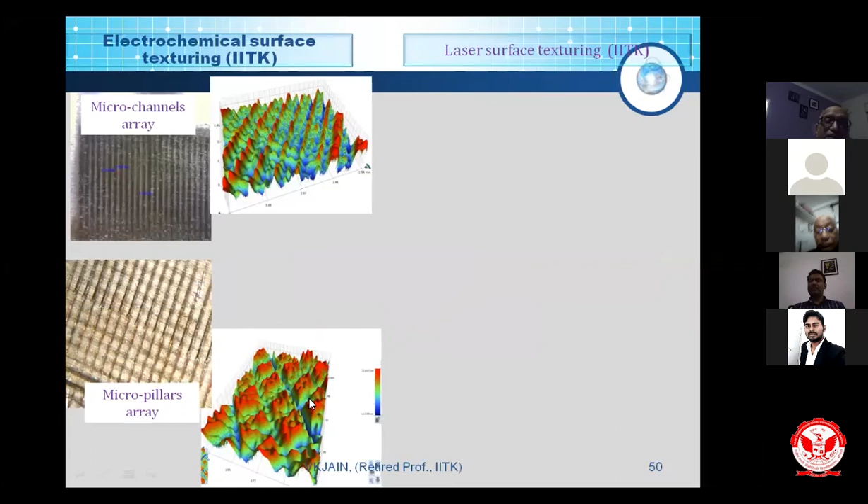Now with the help of finishing processes like magnetic abrasive finishing or other processes, they were able to create the nano hairs over these surfaces. Once you are able to create the micropillars and then the nano hairs, you are able to create a highly hydrophobic surface. These are the micropillars, and over this, by magnetic abrasive finishing or other finishing, nano hairs can be created, and you will be able to create the hydrophobic surface.

As you can see over here, some of the micropillar arrays that have been created at IIT Kanpur are shown more clearly here, and such work was done by different researchers at IIT Kanpur. You can clearly see here.

Now on these surfaces, they were supposed to create the nano hairs. Once nano hairs are created, you will have a highly hydrophobic surface having a contact angle of more than 130, 140 degrees.

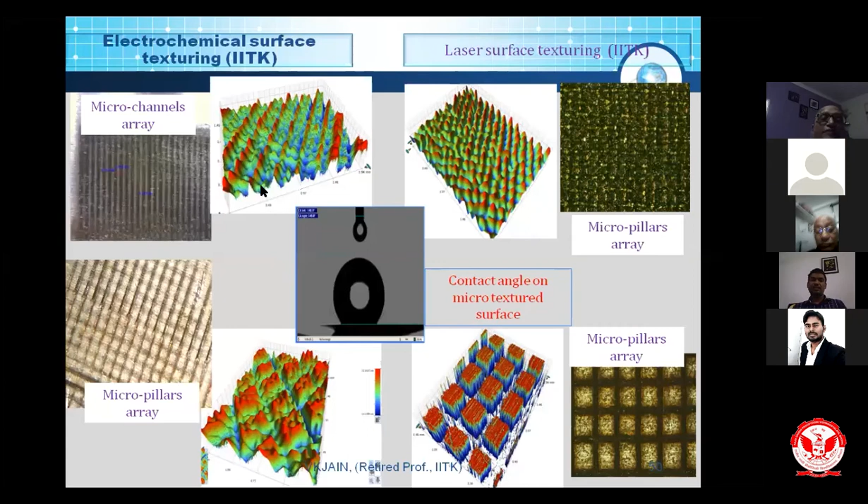Now you can see here, these are the kind of holes that have been created. The hole is very small, I will finish it quickly, there's no worry. Now, as I told you in the beginning, this is another feature that has been created.

This is a 3D feature, as I told you earlier, this kind of cavity has been created by different micromachining processes, such as electrochemical micromachining. This pillar is there, the bottom platform is there, and this is the base. So with this base you can create a small prism, 5 micrometers over here. This is one, and 10 by 12 micrometers is the bottom one, and then you have the large cavity over here, maybe a couple of hundred micrometers.

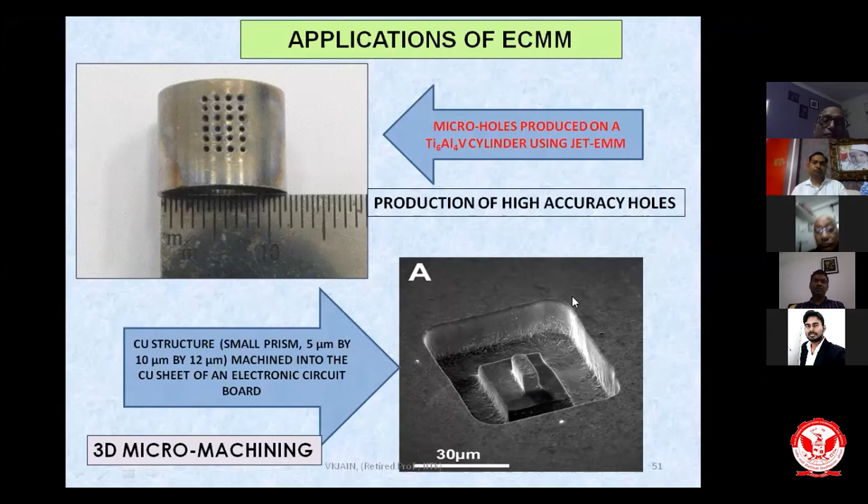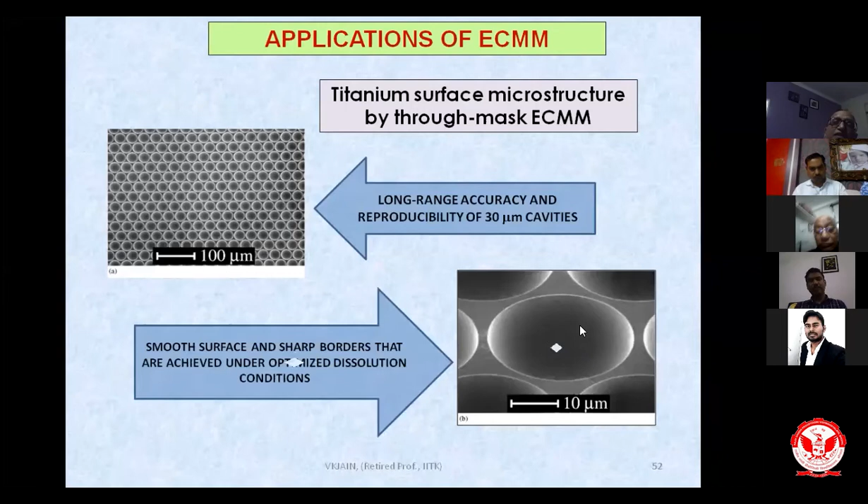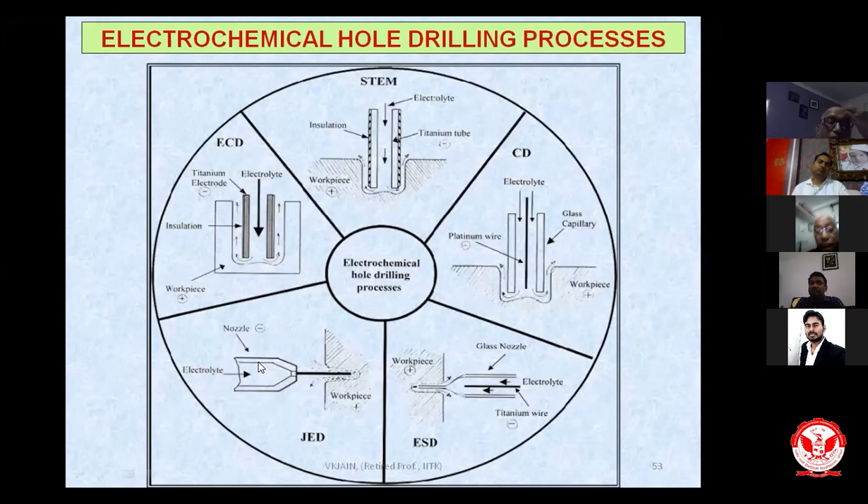Same principle, except here the wire is outside and you are supplying the electrolyte through it. The nozzle is negatively charged, so the electrolyte gets negatively charged, and you are able to get very fine holes. So the difference is: in one case you use a wire to charge the electrolyte, and in the other the nozzle itself acts as the cathode, charging the electrolyte. These are the various versions of electrochemical micro drilling.

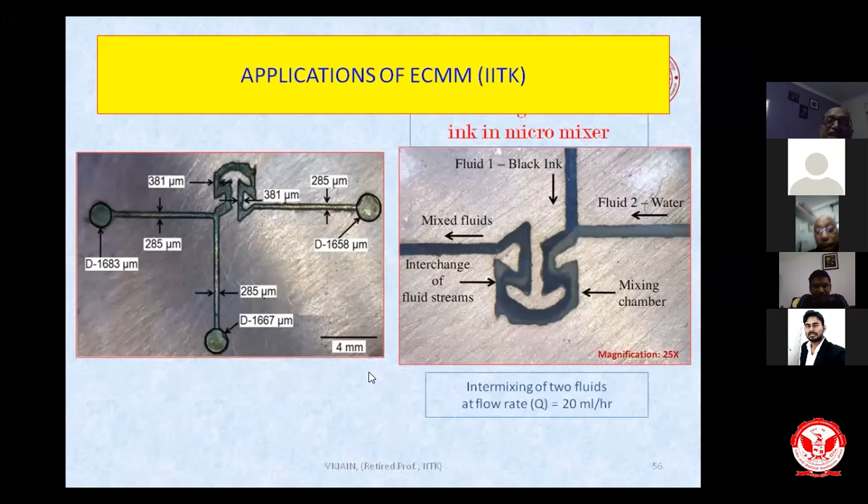We have already seen this. Now you can see this photograph taken while machining, so a spark is being created here in the electrochemical machine. I have already shown this to you.

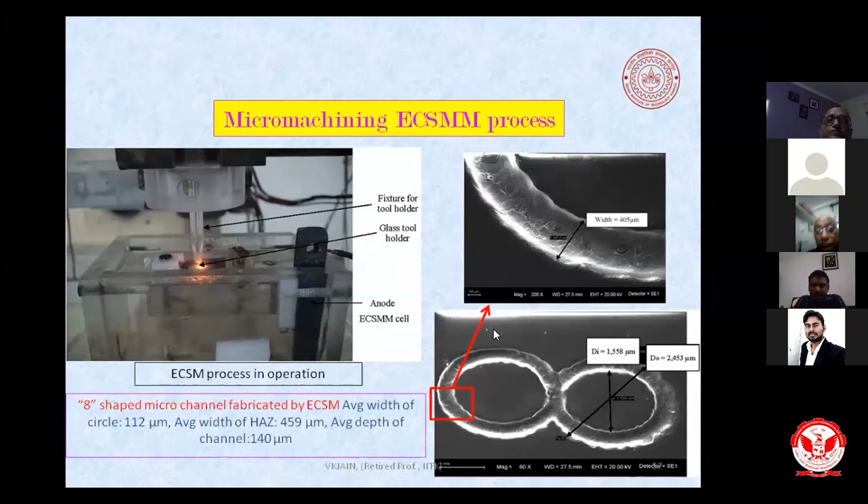In conclusion, I can say that by using advanced micromachining processes, you can successfully create different kinds of features with the help of different types of advanced micromachining processes. It does not mean you cannot use traditional ones, but traditional processes also have their own limitations. Thank you very much.